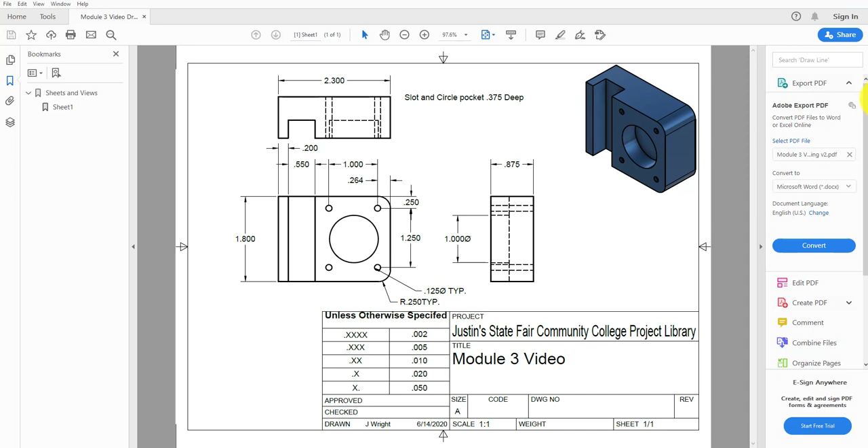Looks like 4 of them on there, and really they're spaced 1 inch by 1 1/4 inch, but they're really not 100% central to the circle on there. Looks like we got some fillets on the outside, so some corner radiuses going around the outside of it. So your assignment, like I said, will be very similar to that, but not the exact same thing. So let's get started drawing the part and creating the model, and then we can work from there.

Okay, so I'm going to move this guy out of the way, just so I've got the reference of it over here on my screen. And let's make sure we've got this thing pushed into view. Looks pretty good. Okay. So we are going to start. So I've got a blank screen. I've just got my Fusion pulled up. I've been playing with it for about the past hour, just making some new drawings and new designs for some of the upcoming projects.

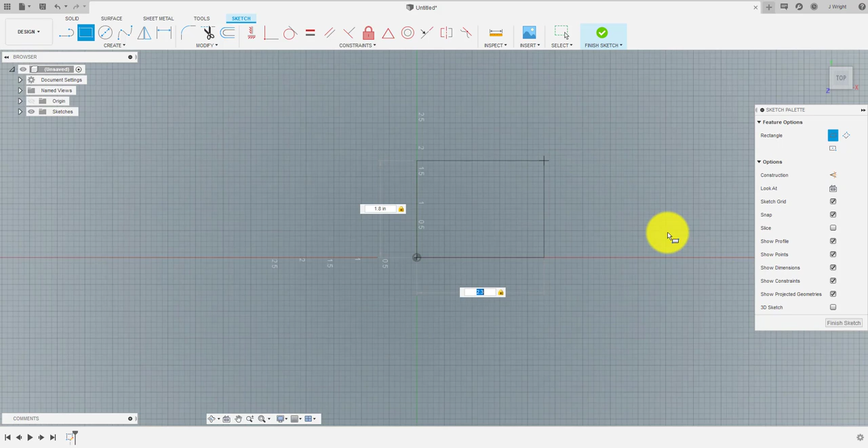So here I am. I'm going to start a new design. I'm going to go on up to the top because I want my Z to be in the positive, and click here. Just get my plane set up, get my grid set up, and as I'm looking at my part, it finishes at 1.8 by 2.3. So I'm going to grab my rectangle. Drag that thing out. And it is 1.8, tab over, 2.3. Click that for OK. That looks good. Finish that sketch.

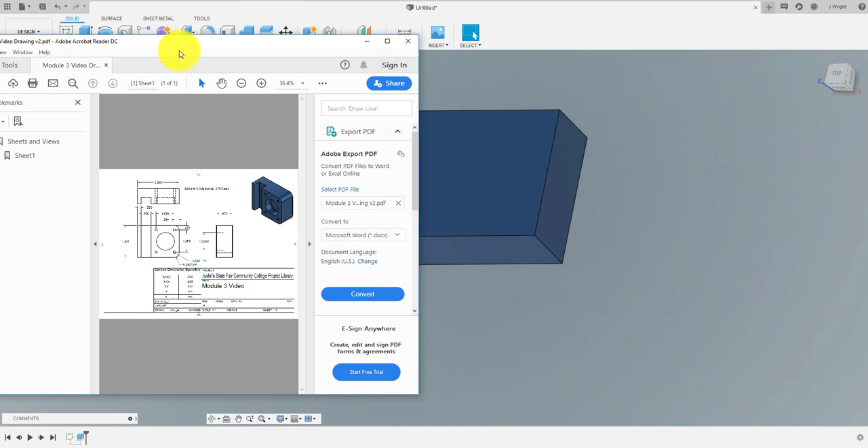Twist it just a little bit, and make an extrusion out of that. I'm going to flip it down the other way. I want to go negative 0.875. Drag that thing down. That's my rough outline shape. I'm going to go ahead and hit the outside corner radiuses. I'm going to bring the print back in here for view. Put it right here for a second. We can move the part around. Got this part sitting right here, and we'll pop that guy up.

Where did she go? Okay, so if you can see it well enough, get some of this other junk out of the way. I'm going to hit these 1/4 inch radiuses. So 1/4 inch typical in 2 spots, goes all the way down on it. So we'll start working on that next. Typically I have some type of pattern that I work on the part. I made this part earlier, so this is really my second run at making this thing. Not always do I do it the same way, but I generally have a pattern.

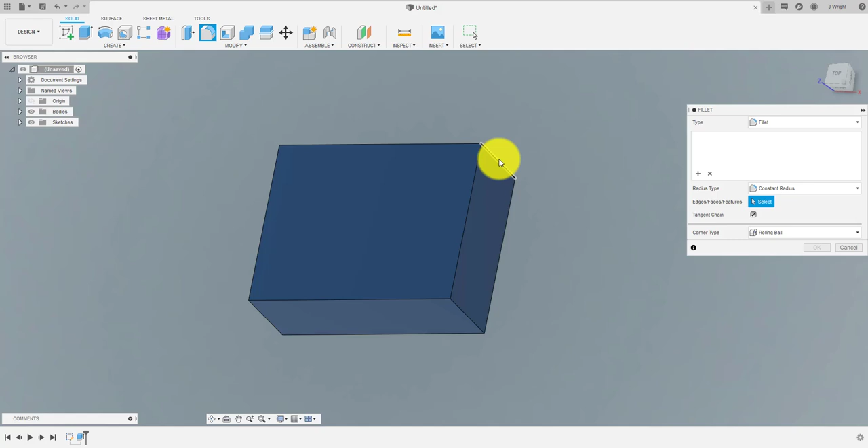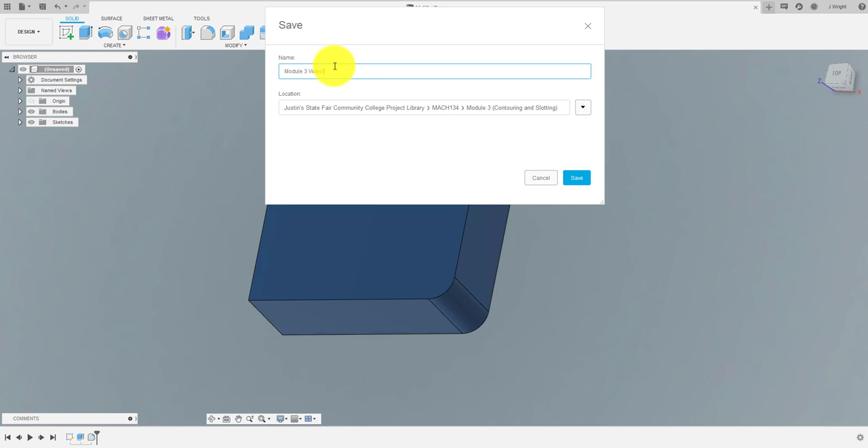So I'm going to hit this corner as well. I got 2 edges selected. I can go in and put those in at 1/4 inch. You can see it changed to 1/4 inch, and hit OK. Now I'm going to do what oftentimes gets forgotten. I'm going to hit save. I've already created a MACH134 Module 3 folder earlier, and I am just going to call this Module 3 video step by step.

Okay. So we'll save it, and then now I've got that thing ready to go. Got it dialed in so that I can use it. So you can see it up here. It's named. And next thing I want to do is kind of dealer's choice. But probably what I would do is work from left to right. I'll put my slot in first and then maybe do the circle and then do the 4 holes around it.

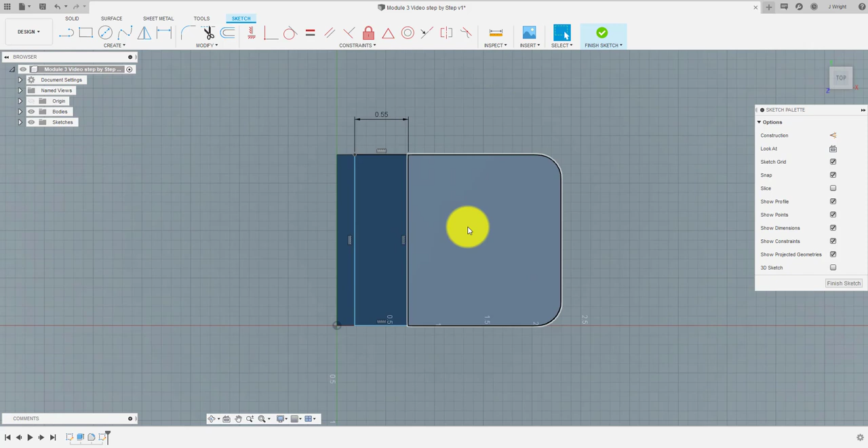Okay, so I'm going to go in and create a new sketch. It's going to be right on top there, and it's going to be shaped like a rectangle. It actually will be a rectangle. It will be 1.8, automatically hits that, so I just tab out, I go 0.55, and good. So now I've got my width established and my length going all the way across the part. So go ahead and grab this dimension button here and go from this edge to this edge here, and it needs to be 200 thousandths off the edge, I believe. And there we go.

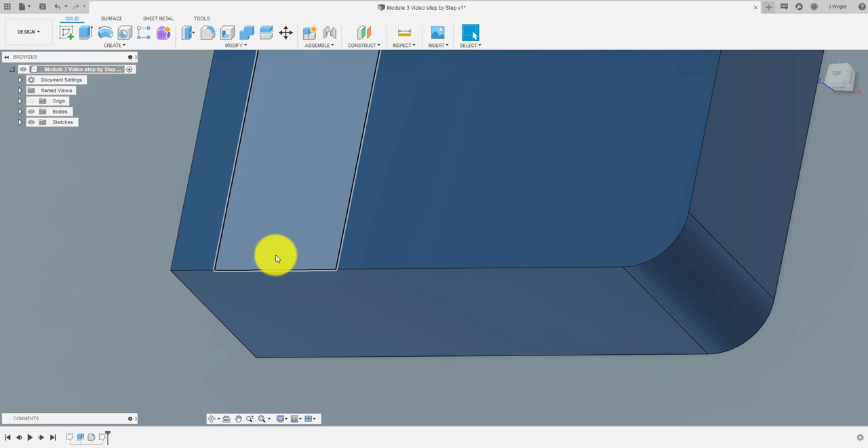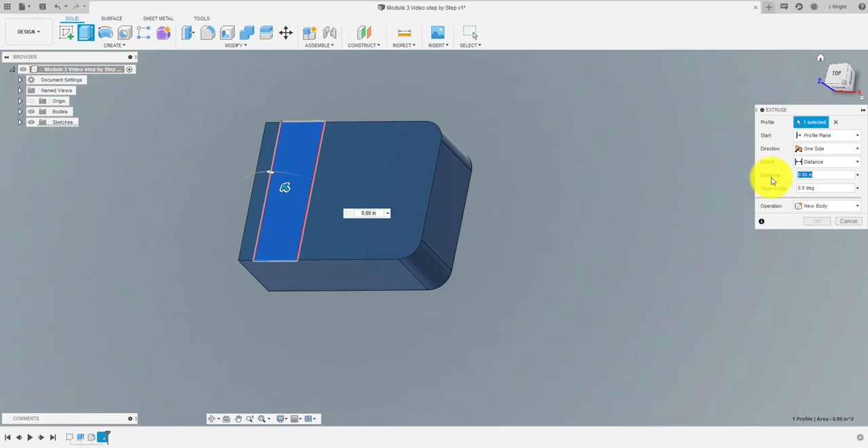Finish that sketch. So from here, now this looks a little wonky down here. Could just be the way that I'm tilted. So what I could do is put the circle in next, and then I could extrude both of them. I'm already here. I kind of like to work from left to right. So let's go ahead and extrude this thing down. -0.375 is the depth for that guy. And we're going to cut into it. So we hit OK. And we've got a cut in there.

Now, if you remember from last time, we've got this timeline building down at the bottom, and it's just a really quick way to see everything that we're doing. So this is just a replay of the build that we've gotten here so far. All in all, pretty simple. We've just got a rectangle that's been extruded down. We've got some radiuses in the corners here, and now we've got a slot that runs through it. 200 thousandths off the edge, 550 wide, 375 down.

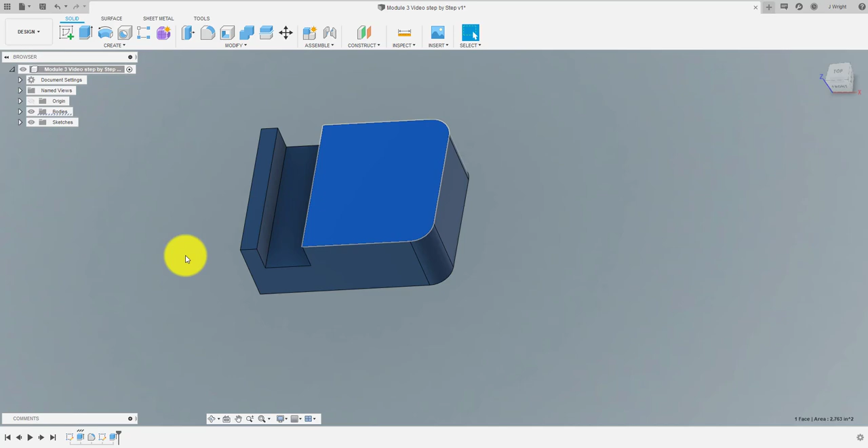Next thing I need to do is put a circle in the middle of the part. So we're going to create another sketch, put that right on the front there. I'll put that circle right in the middle. Let's put it right there. And we're going to go to 1 inch, so 1.0. And then we need to pull it around to the middle. So I think here would be 800.

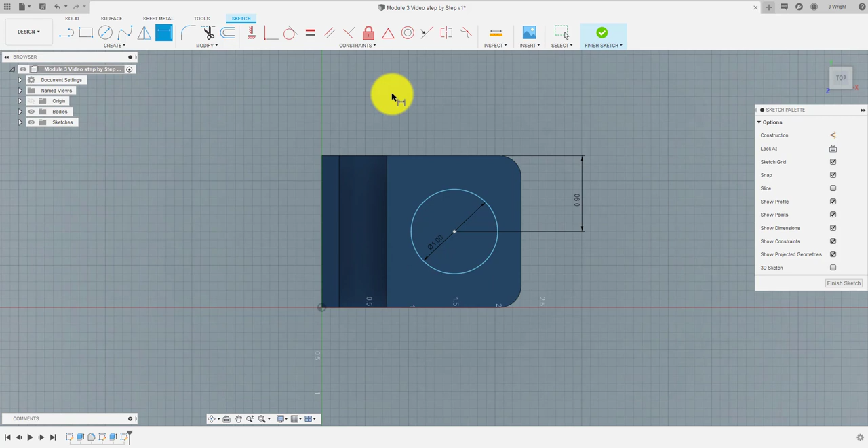And then my other dimension from this edge. Gosh, I'm looking back on my print and I don't have that dimension there, so let's just say that is 0.75. Okay. So we've got a circle there. Finish that sketch, and then we will continue to do the same thing. So if you notice, we're kind of going in a rhythm. Draw the 2D shape, extrude it out. Draw the 2D shape, extrude it out. And so that's the pattern of a lot of these more simple designs.

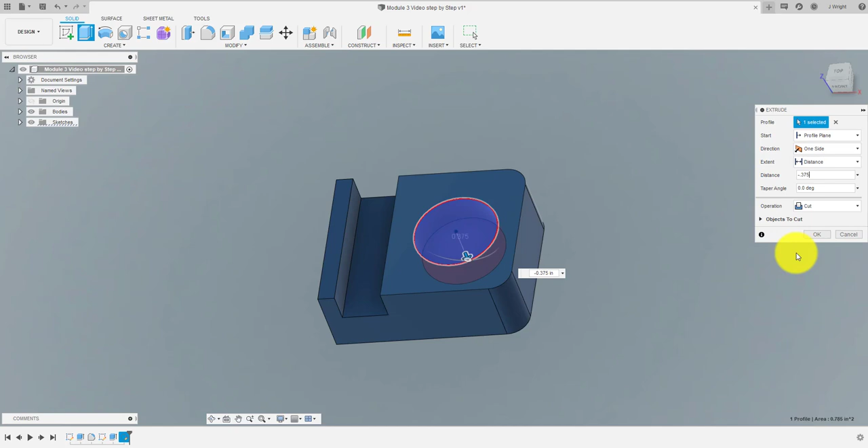So here I just clicked on my circle. I want to go down 375, so -375. Got my extrusion in there. It's cut. Moving along through it pretty fast. So if I get flipped around or upside down, I can just keep rotating myself back around, getting in the spot that I want. I've got shadows set up so that I'm going in the plane that I like. It's just more of a personal preference.

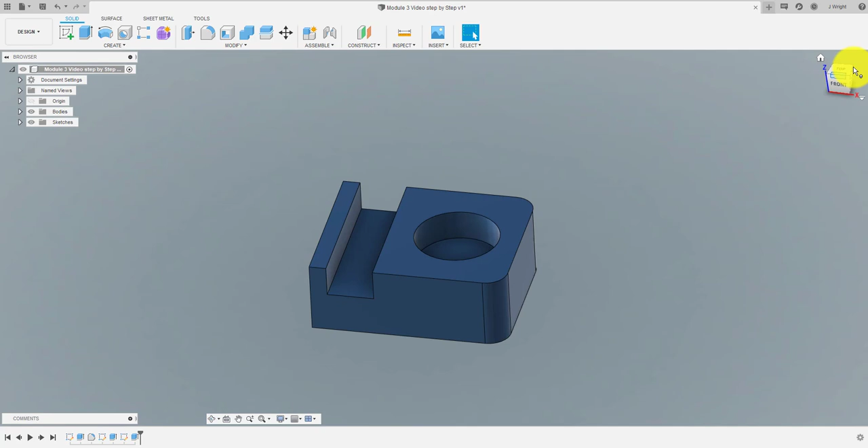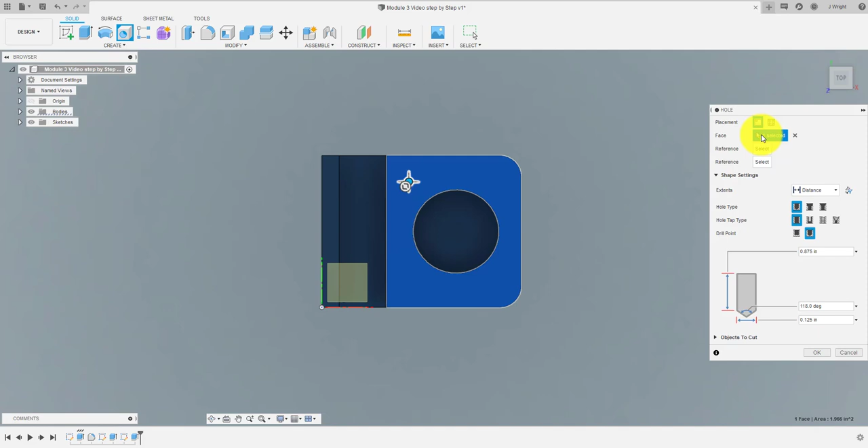Okay, so now I want to go back to my top. I want to create some holes, those 1/8 inch holes, and there are 4 of them. What I'm going to do is create a single hole on this face right here. It is going to go through, and it's going to be an 1/8 inch diameter, so it's got to go at least 875 deep. And I will put it into place. So I'm going to get some dimensions, and from that edge, according to my print, I am 1 inch, 264 thousandths.

Okay. Now I'm going to click this next edge, and it is going to be 250 from the top edge. That's my first hole. You can see the gray behind it, so that means that is a through hole. So we've got that. Now I can continue on and draw myself 3 more holes, or I can go over here to this little grid looking thing.

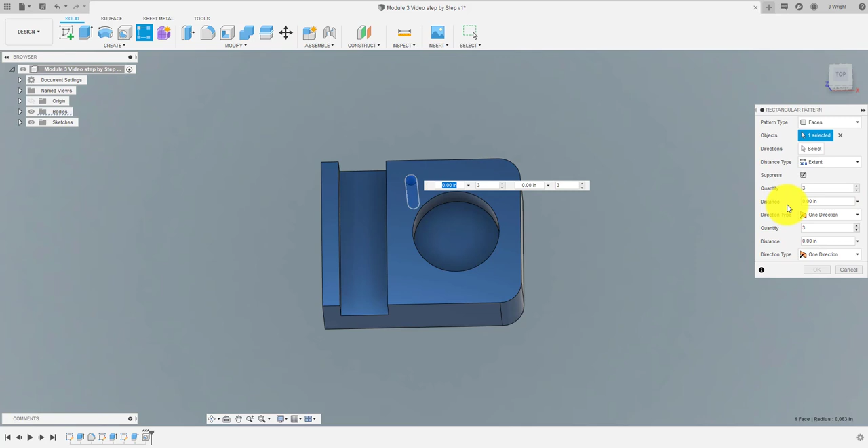It's a grid. So next thing I'm going to do is select the object that I want to copy. I'm going to make a rectangle pattern. And I'm going to go over 2 holes and down 2 holes. And those holes are going to be spaced 1 inch apart.

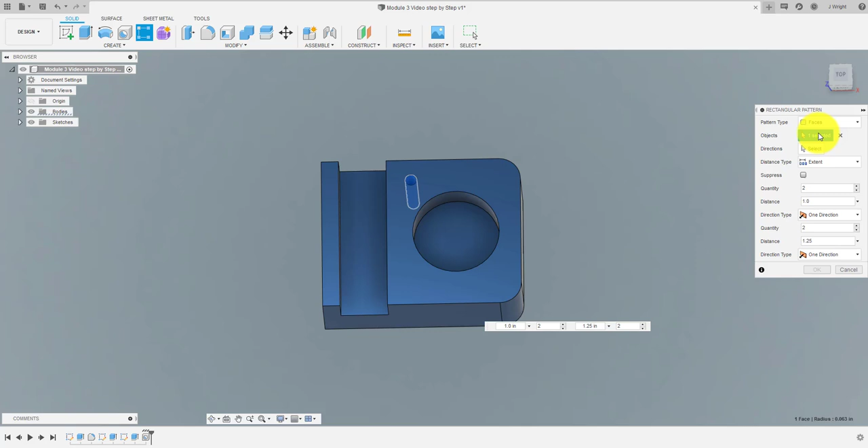And I'm going to go 1.25 down. And I'm going to show them. And let's see, I have not clicked a direction. So direction is going to go this way. Sorry, I got out of rhythm. I should have went top to bottom, and I did not.

So I'm going to go 1.0. Let's go. I can either go negative 1.0 here, which is probably easiest. Get it on the other side, and then my other directions would be going down here, and then that direction. Whoops, need to click that down to 2, and then we'll go to here at 2, and then we'll go down here at 1.25, and that creates my square. See, it's starting to form there.

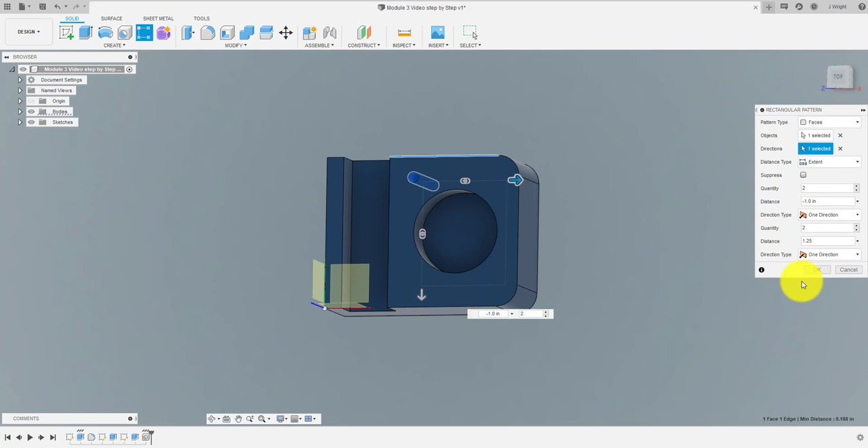And so I have my object selected, and I need to pick direction. I need to kind of follow the pattern from top to bottom. It makes better workflow. So from there on out, I can click that, get my 4 holes. And see, almost drawing in Fusion or Inventor, HSM, whatever it is that you happen to draw in here, we're just using Fusion today.

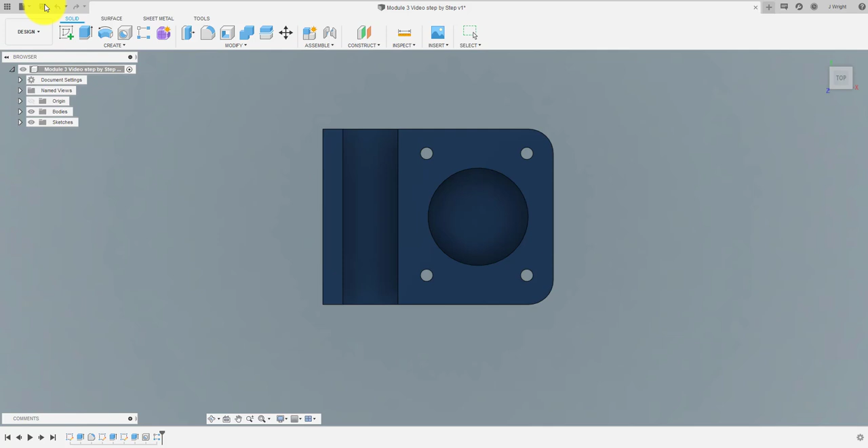No lie, Fusion happens to be one of my favorite things. It's almost too easy to draw in it. You know, if you go back to the time, if you drew in 2D AutoCAD, to do this was a much more labor-intensive project. What you do is you find yourself kind of just writing a lot of notes, and you were not able to make such vivid 3D drawings.

So that takes care of essentially my drawing itself. Again, I am saving, so it's grayed out, so I've saved all I need to. If I want to just force a save, I can go into Save As and then save it again. If I want to go from the beginning again, just like we showed before, we can kind of go step by step all the way through it and get all of our steps. Anyways, that's just for show.

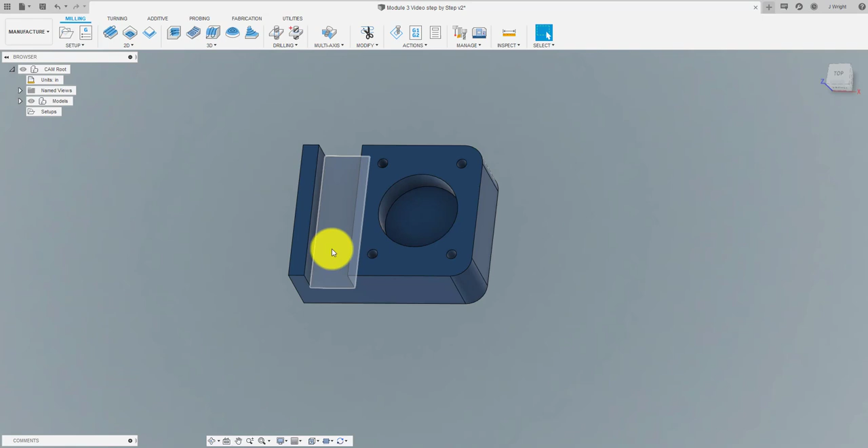So I've already created a drawing, so I'm going to go straight into manufacture on this thing, and I want to make this part. Now, I already know kind of how I'm going to do it. I already talked about it a little bit. I've got a piece of stock that's 1 by 2, 2.5 inches long. Hopefully somebody sawed it up and made it at least close to what it is. It's going to saw at 2.3.

I know the tendency is to, if it's going to saw at 2.3, we're going to saw at 2.5, and then it starts to grow and starts to grow. Remember, you're making your end mill do a lot more work. You're not always saving parts. You're not always saving time, and you're not always making better choices in doing that. If the saw length is set for 2.5, 2.5 is the goal, okay?

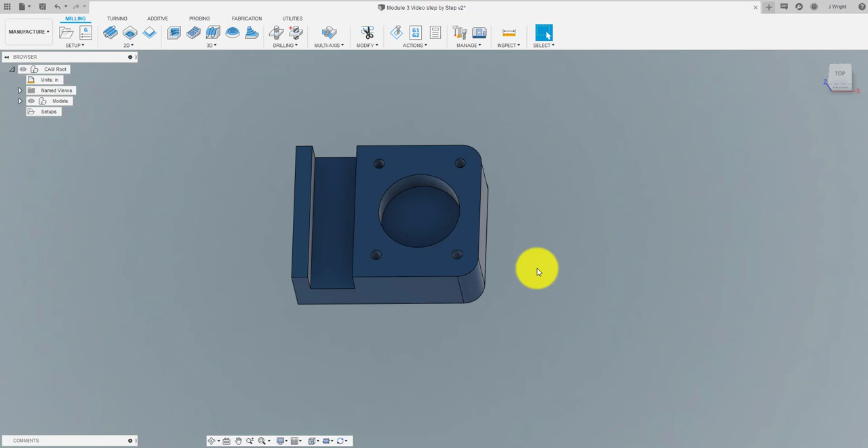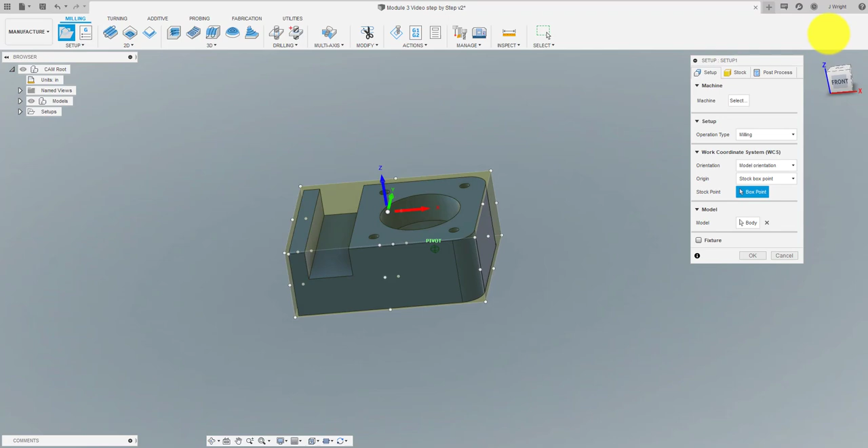So in my manufacturing, I want to stay kind of going across this ribbon left to right as much as I can. I'm going to veer from it just a little bit. I'm going to jump over here into some other parts and then hop back in. So I'm going to go ahead and do setup. And like I said, I'm going to have something that is 1 by 2 by 2.5.

I want my 0 point to be up here at the corner of the stock. Okay, so that means when I come in, I do my edge finding. I'm doing my edge finding from stock since I'm milling all the way around the part. Okay, I am milling. I can select my machine here if I want to. Choose this Haas. At this point, it really doesn't matter. No fixturing. I'm going to try to force myself to go top to bottom, left to right.

Now, what I don't want to do is just do this standard stock offset of 40 thousandths. If I do that, it's really going to cause me some pretty big issues later on. I do know that I have about 100 thousandths around it that I need to work from, because we said it's 2.3. We're going to saw at 2.5. It's 1.8. It's 2-inch stock. So that makes pretty easy math.

And now our top offset, I want it to be 50 thousandths. Again, that's just for easy math. Our overall part height is 0.875. So I want my bottom, if this is 50, I want my bottom to be 1.2. No, 0.12. There we go. And so now, let's see, I've got something just a little bit off here. So I'm 2.5 by 2.

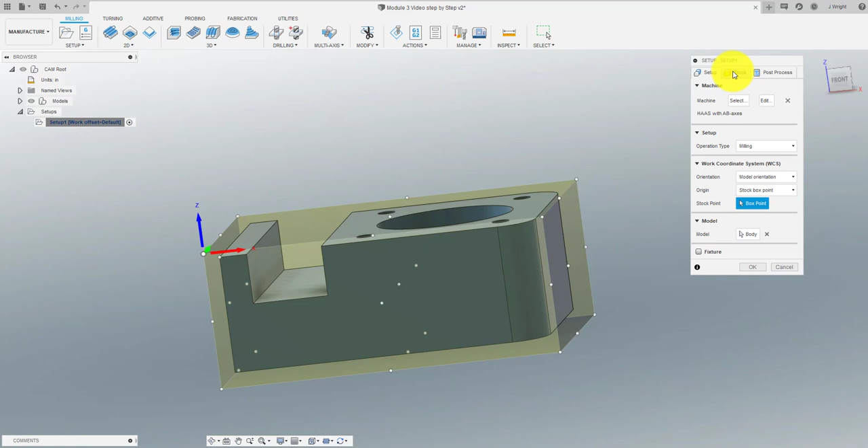So stop there, go back here, and I want to go back into the design, and I want to look here at this feature. I am 875 deep, but somewhere I've gotten off on my math. So let's go back to manufacture, and let's do this. Let's go back in here. We'll edit this guy. Going from left to right, top to bottom. We're going to go over here. Our side offset is 100 thousandths. Our top offset is 50 thousandths.

If our overall part is 875 and our stock is 1 inch, then okay, 0.075 puts me, so just bad math on my part. Okay. So earlier I had said that we had about 100 thousandths to stick up. That's going to get much, much smaller. So I think what I'll do is I'll go ahead and just do this. Let's give ourselves bottom offset of 100 thousandths. And then let's give ourselves about 25 thousandths on the top. It is a stock piece. Again, that was bad math on my part.

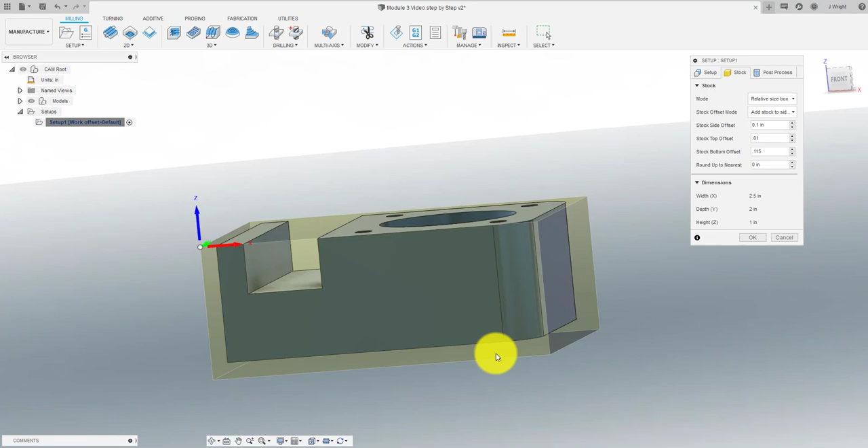I might even just shorten this up just a little bit and call this 10 thousandths on the top, and then 115 thousandths in the bottom. Because I want to show you what we want to do here as we're milling. So I got just a little bit up there that you can see, and then if I'm in the vise jaws 100 thousandths, I need to have it up just a little bit more. So at this point I'm okay again. Okay, so just a moment there, and I can come over here.

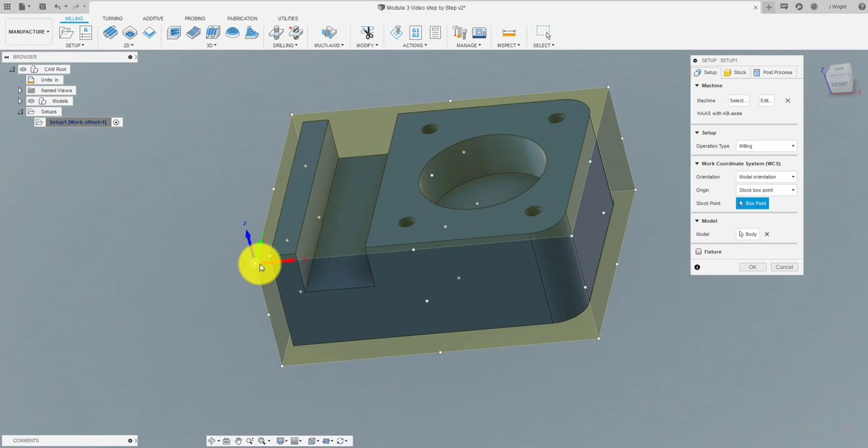I'm going to go ahead and use a new work offset today. I'm going to go to work offset of 1. That's going to be G54 on that work coordinate system. So everything else stayed in place. And corner X0, Y0, Z0. Easy setup on that. And I can hit OK.

All right, so if I want to, I can name that here. And I'll just call this, let's call this the BF, no, we don't want to call it that, so we're just going to call it mill setup 1 of 1. How about that? Okay, and that setup is done. At least we know what it is, where it is, and how it is. So next thing I'm going to do is start to work through milling around the outside of it.

Last time we did no outside milling, we had a part that was like 2.5 by 2.5, or maybe 2 by 2. All we did was some pocketing, some facing, and I believe a drilled and tapped hole in the middle. So what we're going to do is something that in the beginning of CAM life I probably thought was foolish, but now I think it's a little bit better. FeatureCAM used to use it a lot, and they called it AFR, automatic feature recognition.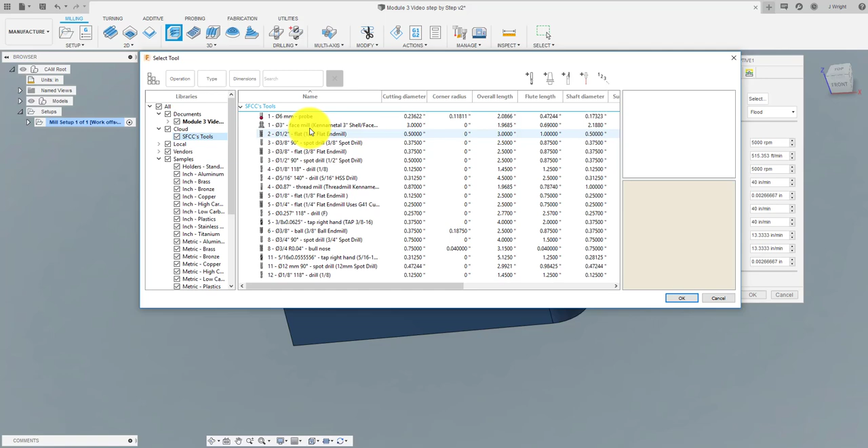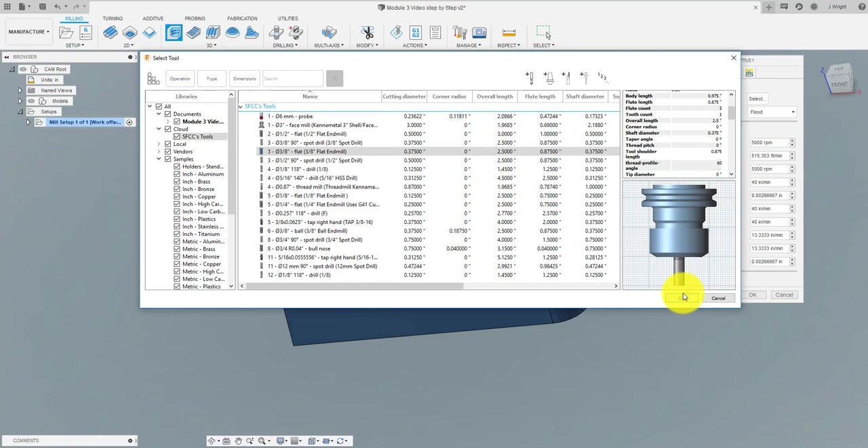And so what I'm going to do is I'm going to go in here and hit this adaptive. Now adaptive is going to try and start to work off of what I've got, and what tools I choose and try and do as much as it can. Okay, so I'm going to go in and just for fun here, I'm going to grab this 3/8 flat end mill, 3 flute end mill. It's got a flute length from the shoulder 875. Yeah, it'll do this part, but it'll just do this part. And really, for what we're working on, it's probably going to be right on the edge of even being able to do this part.

Spindle speed and feeds and speeds, 40 inches a minute. Sounds like it's okay. I can either make some adjustments here. I love an even number. And bad thing about that is it's always going to change one other number. So we're going to say we're going to go at a 5 thousandths chip load, and we'll leave the ramping in and out and the plunging okay. So this end mill will need to be, not self-centering, bottom cutting. Will need to be able to go down because it's going to do a spiral cut into this.

And if it's not bottom cutting, you have a pretty good chance that you're going to have some problems on the bottom. Okay, so I'm going to go in here and I'm going to click the model. And I want to make sure I click the entire model, okay? And I really don't need that taken care of. I don't really need that. So I'm going to come over here. Now here's something that, actually I'm not going to do anything with this now, but I'll come back to this.

Okay, so again, 3/8 end mill. Here's kind of where we're doing all of our stuff. Stock to leave. I don't want to bring this into finished cuts. I want to go ahead and rough it out and then finish it out. In the print, I'm giving 3-place decimal plus or minus 5, which would marginally be, depending on the end mill that you're going to work with, would probably be okay. We're going to leave 5/1000ths in both axial and radial. That should take care of everything there, and then I think I'm pretty set from here on out. And let's see what it looks like.

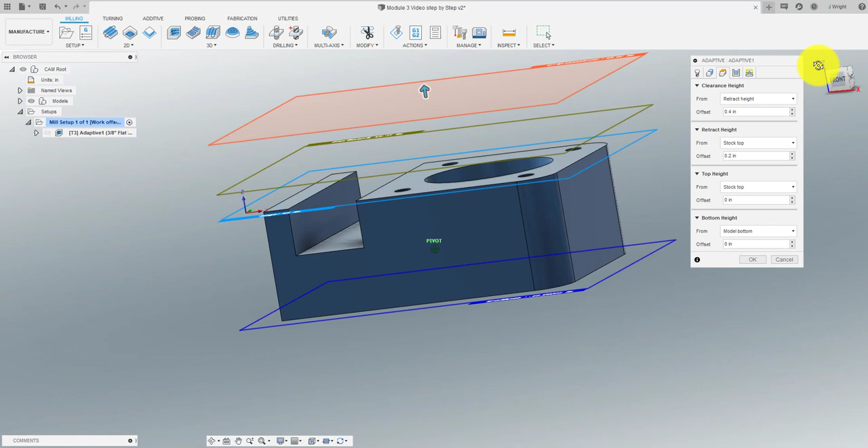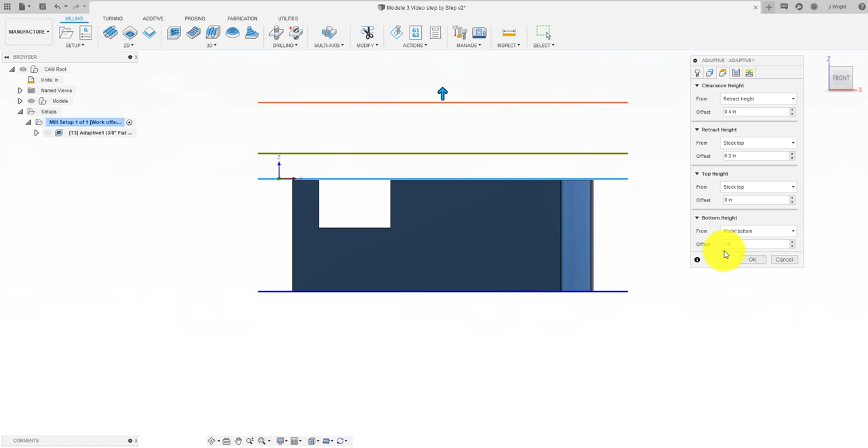And one of the things that I want to do is I want to change out where I stop. Let me flip it to the front. I actually don't want to mill the top of it. And I do want to go beyond the bottom of it. So the bottom of it, I got the model bottom. I want to go beyond it by about 50 thousandths. So you see it moving it down. Actually, 50 thousandths is going to be too much. So let's go 10 thousandths deeper. Then that way I can get beyond that bottom. That way whenever I go to my second operation, if I want to flip it over, chuck it in the vice jaws or a fixture or something, set it in here, mill off that back side, and then that way I'm not left with a little razor edge going around that.

Okay. So let's see what we start to look like now. Looks pretty good now. This is a lot better part. So now I'm milling around the outside of it. Flip back over here into this front view. Rotate back up. And as you can see, I'm coming through and I'm doing some clearing on this. Coming in here, knocking this guy out. I'm not doing any kind of facing on it. Though I could come in and take this 3/8 end mill and do some facing if I wanted to, but for the way I want to finish this part, I don't want to mess with that. It would be really redundant, especially since I've got like 10 to 15 thousandths on the top. I'm going to end up cutting and recutting essentially the same thing, or I'm going to have some paper thin chips.

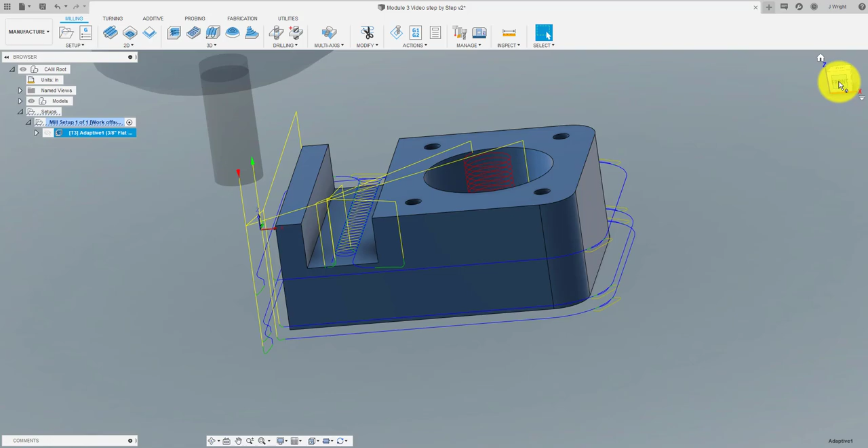So here's what I wanted to really show you: look what Adaptive is doing. Adaptive's taking care of all of my milling around the outside, leaving stock. My milling throughout the slot, leaving some stock, and my milling all in this pocket, again leaving some stock. It's coming down far enough that I can get below the part. Like I said, I'll need to do a little bit of work to my end mill to be able to get it to go all the way down. But this is really slick at this point. I mean, it's essentially one operation doing a whole bunch of stuff.

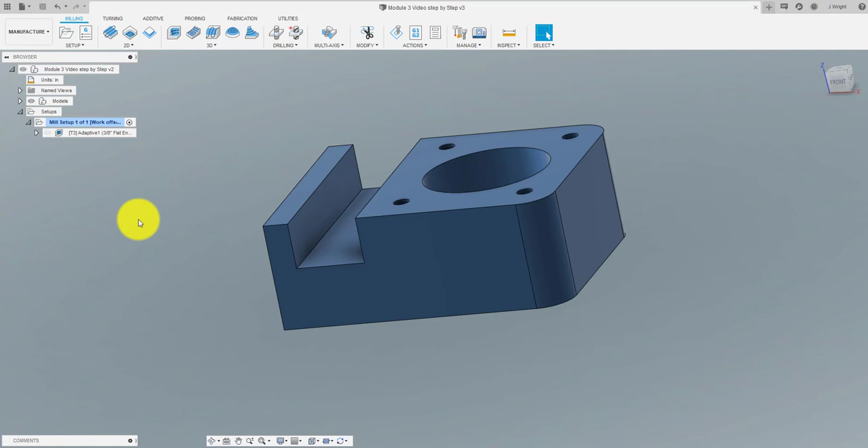Okay. So at this point, if I wanted to continue on with this roughing out, finishing out option, I'd probably go to my holes next. What I want to do is I'm going to go ahead and come into my automatic feature recognition.

Sorry, hole recognition. Now it's coming up with two different things because it technically sees two holes here. It sees some 1/8 inch diameter holes, 1, 2, 3, 4, and then it sees one 1 inch hole. I don't want that 1 inch hole. I don't want to mess with that thing. So I am just going to ignore the 1 inch hole.

Okay, so now as I do my hole recognition, it's going to go ahead and just post out my 4 holes. Now, one thing I want to come back to in that is there's a lot of hole choices that it's going to come up with. Honestly, depending on what kind of a drill I'm using, I may not even spot drill these holes. If I've got a good little 3-flute drill, or maybe even a spade drill, and a nice little drill,

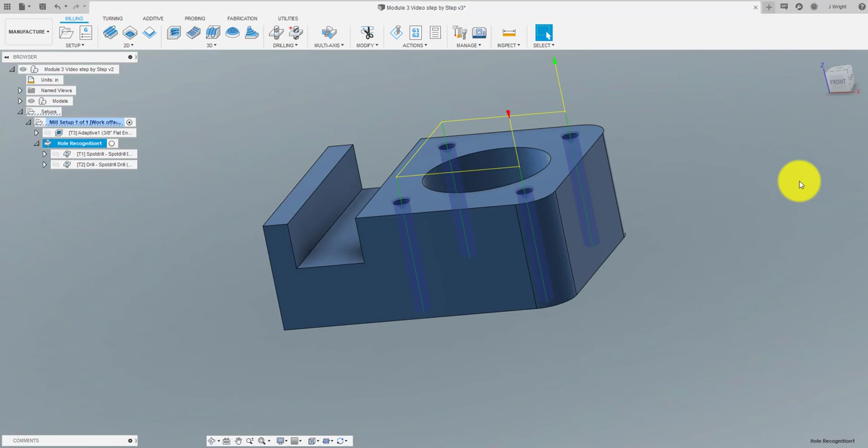it's small in diameter. You're talking about 1/8 inch, and it's got to go down .875 plus clear the hole, so another 0.3 times the diameter to get through there. It's got to go down a good solid inch to get through it. So maybe I'm spot drilling, maybe I'm not. At this point, I don't have a really good tool set up. I have them sitting here as 3, 1, 2 is the way I should say it. But I've got the holes in there. I can keep working with that as I go.

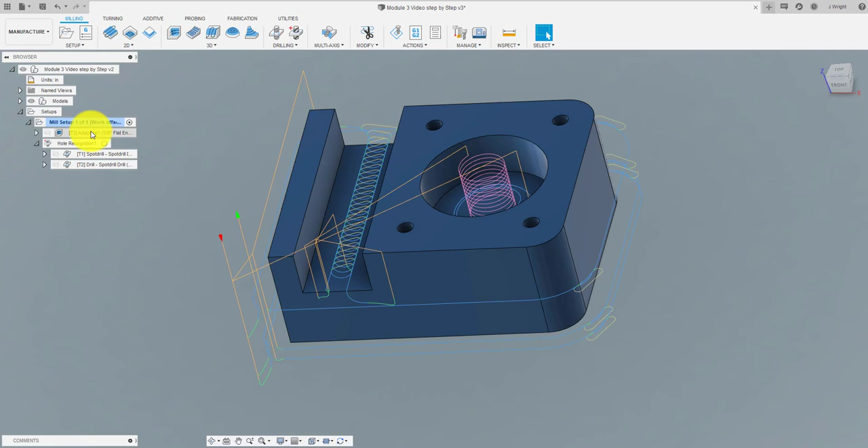Okay. So here I've got my milling of the outside, so all of my roughing. I've got my holes done second. And then now I need to come in and do some finish work on this part. And so what I'm going to do is I'm going to go back and do some facing. I do not want to use that same tool. I could, but I do not want to. Go back in to grab my 3-inch Kennametal face mill.

So I want this face, and I also want this face. So I want to make sure I go all the way across there. So 3-inch face mill, I'm going to go across there. I do want to extend it. Pass extension by, let's go 1.6 just to get off of that part. Don't need to do multiple depths, don't need to do any kind of stock to leave on there. And it should be good to go after that.

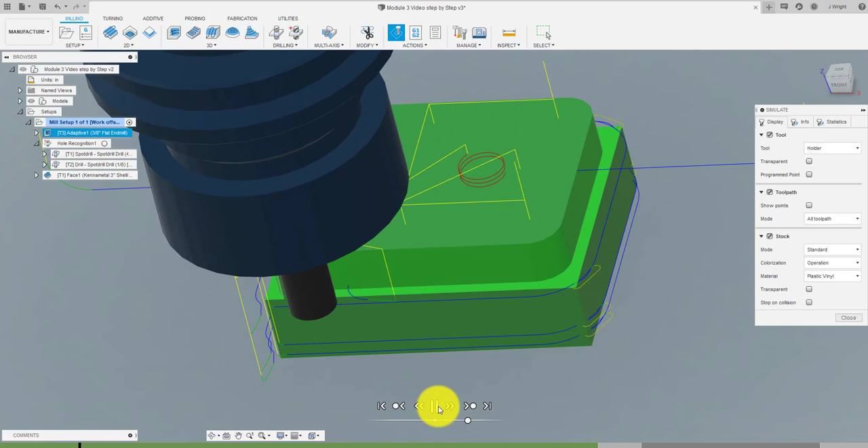Okay. So if I want to watch from the get-go, I come up here and take a look at this thing. So I'm milling around the outside of it. You can speed that up if you want to. And remember, it's trying to make good decisions as it goes through so it can be as efficient as possible. And that's why you're going to see it do some things that may not make sense to you. Like really, it's taking care of all of the machining at the -.375 depth right now. If I was manually machining that, that's not the pattern or path that I would take. But you're talking about seconds of decisions, and it's good enough for what we're working with.

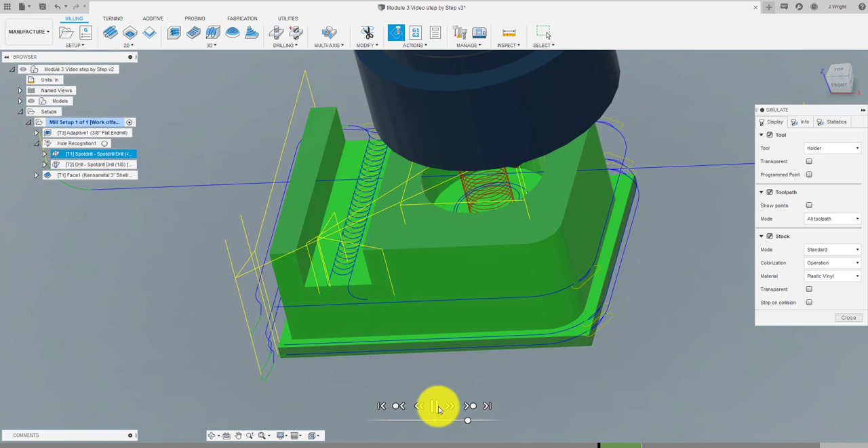Now, if I was making billions of these, well, first of all, I probably wouldn't be making them quite like this or with these tools. But in what we've got, if we need to make 100 or less, this is an appropriate way to do this. Okay, so that should be pretty close to my final depth. Okay, that tool's done. Got 4 spot drill holes.

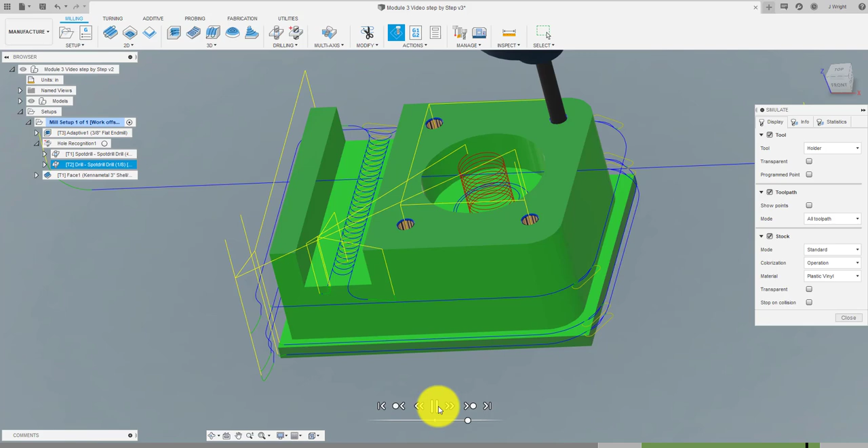Now, if you'll look, as it's peck drilling, it's not coming all the way back out. That's one thing that I want to do some changing with. But I am spot drilling deep enough to leave a little bit of chamfer on top of it, just so my deburring operations go a little smoother. Face mill is done with a nice magenta. Okay, so we can stop there. I still need to come through. So essentially all I have done in finish land is the holes are done and this top face is done. I'm going to go ahead and save.

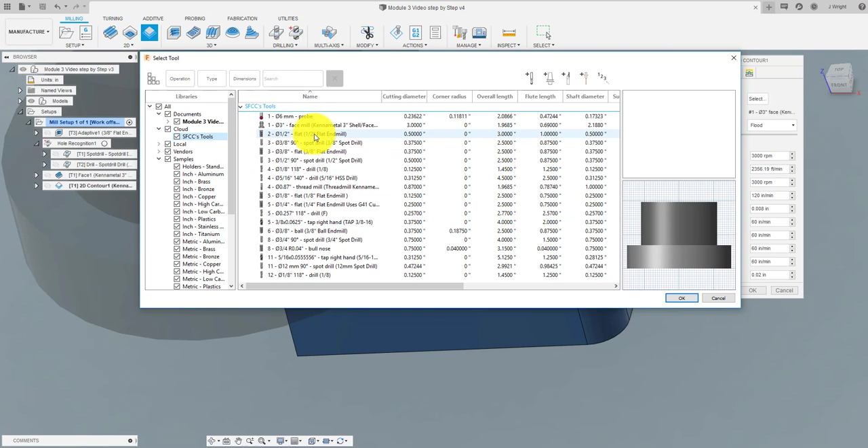Now, at this point, I want to knock out the outside of the part. I want to knock out the hole, and I want to knock out this slot. To do that, I'm going to go ahead and go into contour. And similar to adaptive, I can really probably do this all in one shot. So I'm going to grab a new tool, and I'm going to grab my 1/2 inch end mill. I know I just passed it. 1/2 inch flat end mill, and grab that guy, and it's a 3 fluter.

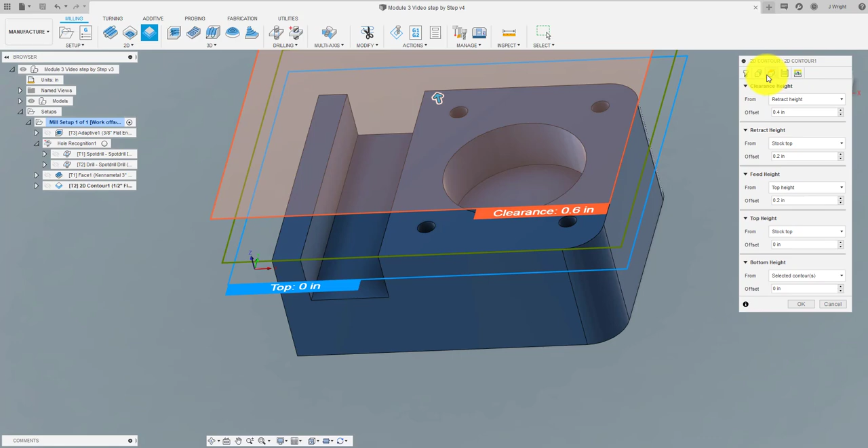It's not really a 3 fluter. We'll do some editing on that as we go, because RPM and stuff can be changed on that. Feed per tooth is okay. I would typically tell you need to make sure those things are right before you get started. That way you're not going back and forth over the top of yourself. Okay, so anyways, small distractions.

Go ahead and select my contours that I want to work off of. I want to go down. I want to mill all the way around the outside, so I'm going to click the bottom of this thing. Get down here so you can see this thing move around. All I do is click the bottom. Red arrow shows the direction that I'm cutting.

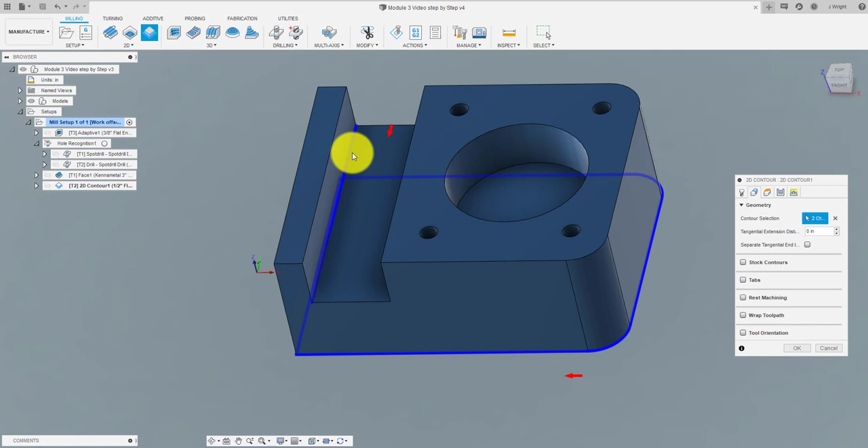Okay, so now I'm going to come in. I'm going to hit this side, and then I'm going to come over here and hit this side. Now, since I've got a 1/2 inch end mill and this slot is .550, if I remember correctly, I don't have to worry too much about doing any kind of special feature for the bottom, because you're talking about an end mill that's 50 thousandths smaller. It's going to fit into that hole or into that slot.

So now, same thing with the bottom of this thing. I'm going to come in, do the bottom of that. It's a 1/2 inch end mill. It's a 1 inch hole. My math is going to take care of itself as it goes. Okay. So let's take a look and see what that looks like. That's pretty dope. So we're going to come through here. One shot took care of all of my contouring.

Now, there are some pros and cons in doing that, okay? Now, first of all, I will say this. Even though I'm kind of showing adaptive today, this is probably not the path that I would take for all things. It's a little small of an end mill to be doing all of this work. It's going to take a little bit extra time to do it. Today wasn't really about speed. It was just showing that you could do this, okay?

Always, always, always try to get the biggest end mill that you can into the hole or the feature, within reason. Give yourself enough room for clearing out, for finishing, for moving around. But today was more demonstrative than anything. I want you to see that you can use this one end mill, and we've done that in class before. So here I've got all of my finished work taken care of. Now do a quick save.

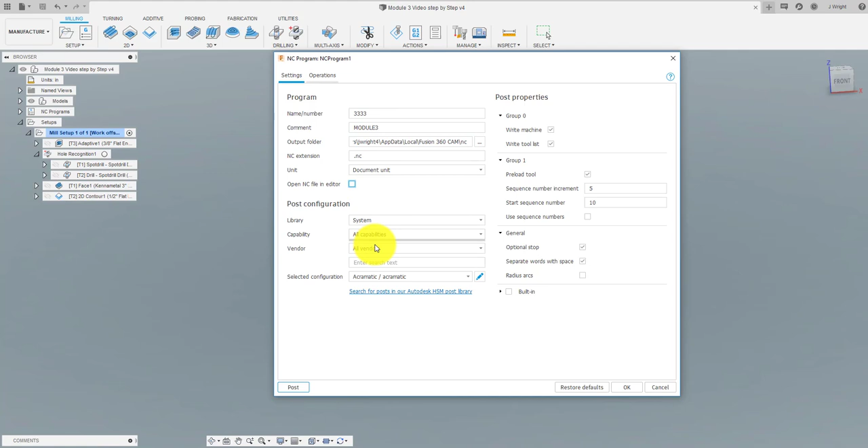Now say I want to... We're just going to call this 3333, and I'm going to do a caps lock, module 3. And I'm going to pick a milling operation, and I've got a Haas, and I've got a UMC 750.

Again, here you got a lot of personal preferences as to what it is that you want to have inside of here and what you don't. Some of these things are going to make some things go a little bit faster. G187 will make life just a little bit smoother depending on what kind of options you have on your machine, so you can start looking a little bit further ahead. Chip transport, if you got a conveyor on there; we don't have conveyors on our machines.

Forced home position on indexing, you can have that. You can have optional stop automatically show up. You can do preload on tool. Preload for tool doesn't do us any good, because honestly, even though I picked a UMC 750, I'm probably going to run this on a VF3.

G28 instead of G53, to be honest, that's probably something that I would check. That's just a personal preference. I guess I'm a little more familiar. Maybe I get a little more warm and fuzzy with a G28 than a G53. A G73 option, and that's kind of what I want to go back to in some of this stuff, the outputting of code and what it's actually going to be doing.

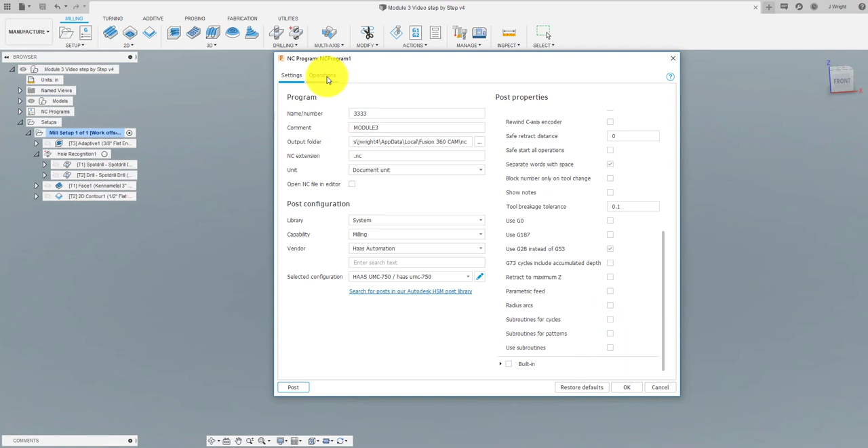Let's look at operations. At this point we have nothing selected, so we're going to select everything. We want to do all things from this particular operation. So I can hit OK. I could also hit post at that point if I wanted to. I'm going to come in, I'm going to do a quick save. Now let's go ahead and just look at the entire program.

So I can go ahead and go to... sorry, I shouldn't have done it like that. Come back up here to my NC program and do a right click from my NC program and hit post process. Come down here and hit view NC code. That's probably my smoothest, best process.

Again, you get intensely long code in outputting using a CAM system. You're getting much longer code because in the beginning you're using this 3/8 end mill. And if you're the programmer and you don't care about how long the code is, that's one thing. If you're out on a machine and you've got a lot of code in your library, this could start to be an issue for you.

Here's where we went to G28 instead of G53. If you do a G28, you have to go back to a G90 afterwards. So what we're doing is we're going to go inch input, G20, G91, Z0, our spindle goes all the way up to the top. We go back to absolute programming from there.

We went to G54. I thought we had clicked 1 in before, and maybe 1 is 54. I thought 1 was 55. We are absolute programming. B and C is 0. Again, I said we're probably going to run this on a VF3, so it's not going to matter. G43, H3. H3 matches up with our T3.

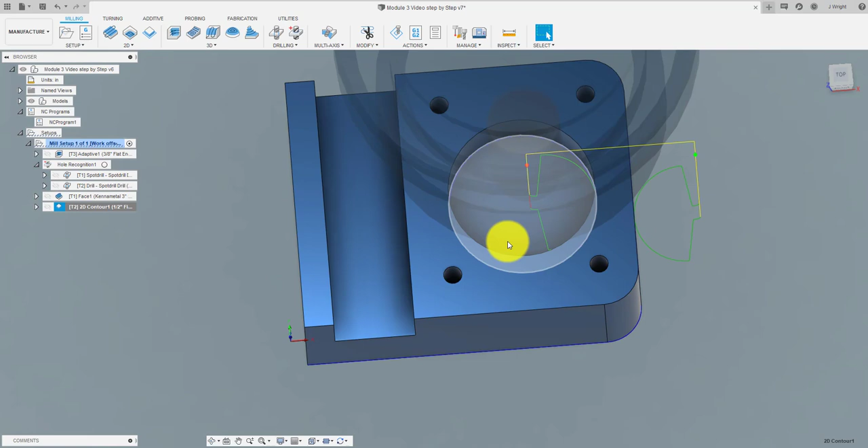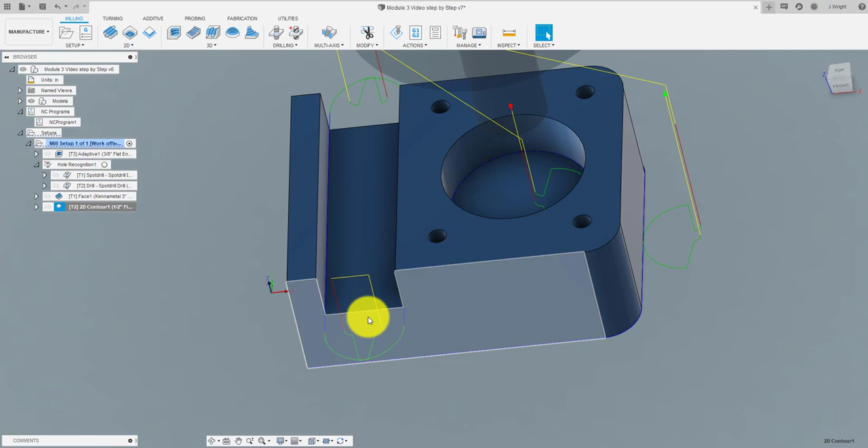Okay, so I get a little bit of a problem. I've got the outside going good. I've got the inside hole going good, but my slot will not generate. So I got to find out what's my problem in my slot. Well, my problem in the slot is about where I start my moving into it. The machine wants to come in with some smooth sweeping motions. That way it stops that little undercut or that little divot that you get.

So you can see, let's flip to the top here. My tool wants to come in, do a partial circle in, go all the way around, do a partial circle out, and then come out. Same thing here. Partial circle in, partial circle out. Ditto over here on the 3rd try. At 50 thousandths radius, my issue is I've got a 550 slot and a 1/2" end mill. If I was still in the 3/8 end mill range, no problem, plenty of room. 1/2" end mill, I've got a beefier, stronger end mill, but I have a lot less clearance in there because I only have a maximum of 50 thousandths.

That's when I'm done. Now I've left some material on here. I left 5 thousandths on each side, so I've got like 40 to deal with inside this thing. If I was manually programming it, I would just come over here, straight corner it, come in, shoot across, back and forth. I can do that here if I want to. But this is giving me some options to come in and do some nice sweeping radiuses. I get a better finished product from it. And to be honest, I could probably tweak up my starts and stops a little bit. Probably come in on this one side.

Wouldn't be my preference. I'd probably come in at a corner at some type of area instead of this giant flat. Now, if I was going to do another operation and cut this off of there, that'd be fine, but I'm not. That would be something kind of foolish to do, so I could change the start point of where that was at if I wanted to. So I've got that taken care of. That makes my program a little bit better.

That's my circular interpolation. Here's what I've been wanting to see: G1, G41, X and a Y with a D2. D2 matches T2, which also matches G43, H2. Okay, so I'm happy there. Let me go ahead and pop back up here and edit something in the post processor. We're going to go up to 2, come back, save that, so I now should be outputting in G55.

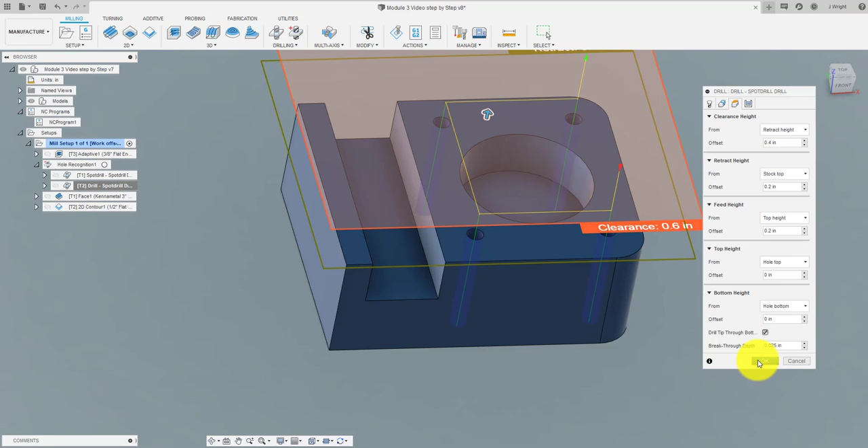One more thing I want to change. I'm okay with spot drill, but I had said earlier I was not in love with that. So I want to come in here and just actually pick the tool operation itself. I'm going to go back into edit. And instead of chip breaking, I want to pick deep hole full retract. And occasionally it'll say use cycle if it's possible. By doing this, it should take care of what I want it to do, I believe. So we'll do a quick save, and I know I'm kind of heavy on the saves. So I just want to output just that one itself and see what it looks like.

Look how much smaller that is. So we had like 1,000 lines earlier, and now we've knocked this down to 25 to 95, skipping in 5. We've got a short amount of holes. So we're doing a G83, G98 for initial level return, and then I got my X and Y, I got my Z, about 950 thousandths. My retract is almost 200 thousandths, a little high for me.

No kind of dwelling that goes in there. Probably my Q is a little bit off, but it is a small hole, so I can live with some of those other things. Probably the 190 wouldn't keep me awake at night, but it would irk me just a little bit. So I've got just a little bit better part now. I can go ahead and come back up here from the top and run it through a simulation. I've already seen it work once, so I'm just going to kick it up a little bit faster.

Okay, so holes that go all the way into the part. They don't come out the bottom, and that's okay. Everything that's yellow is something that my half-inch end mill did. My magenta, sorry, first day speaking. And my magenta is a 3-inch shell mill. My stock size was the green, and so it's left. You can't see anything left of the 3/8 end mill.

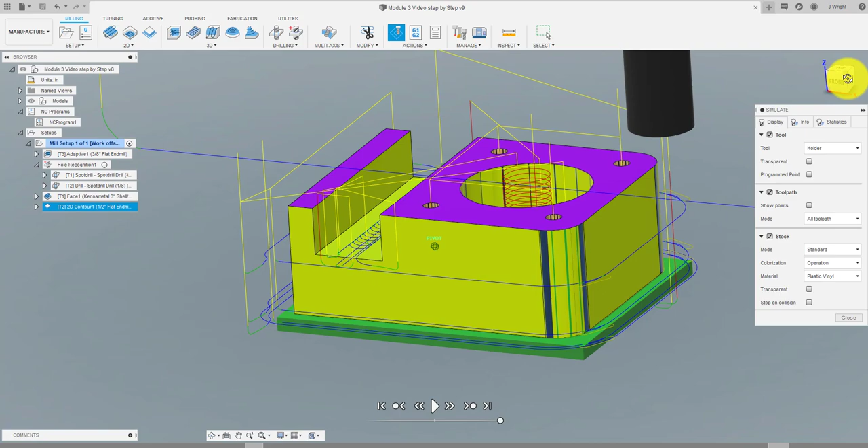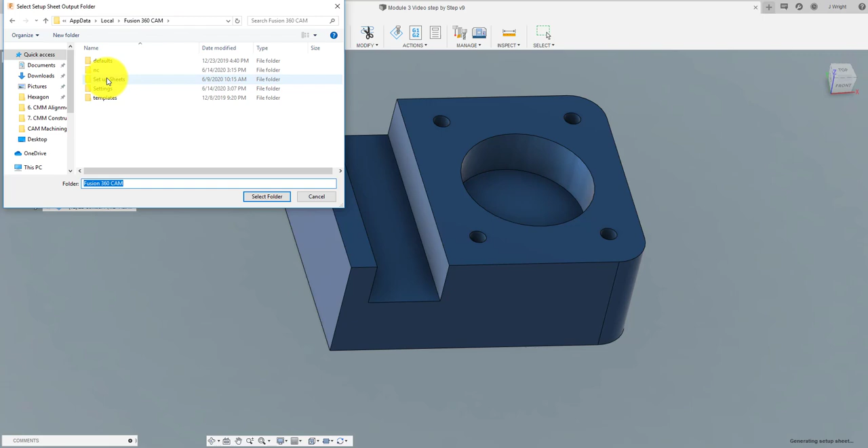Now, again, I don't think that this is a perfect part, but I think it's a functional part. And really today is about showing some different functions, how to use these same tools and get a lot of different results out of them. Okay. So let's take a look at our setup sheet and see what we look at time-wise. Setup sheets, and pop that baby up.

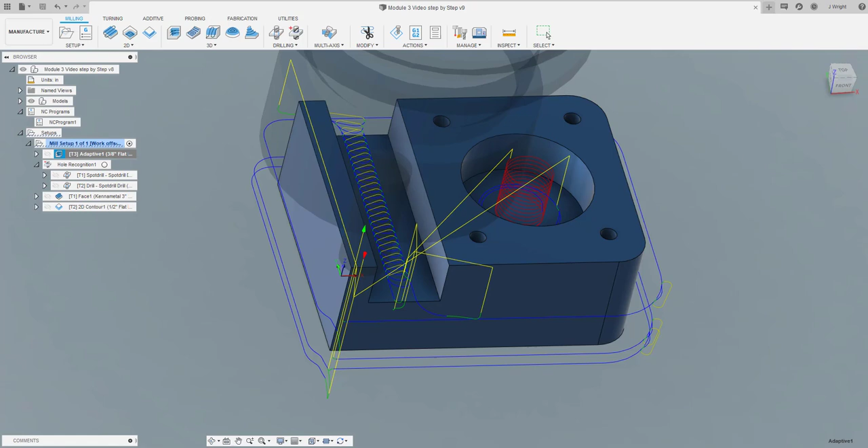I've got some issues. My operator would have a fit with this because he wouldn't quite know exactly what it is that he's supposed to be doing. I've not done a good job of making sure that he has the right information. So I'm going to go back into this adaptive, and at this point I can do a couple different things. So I could come back into just the tool itself, and 3/8 2 flute. Let's call this tool.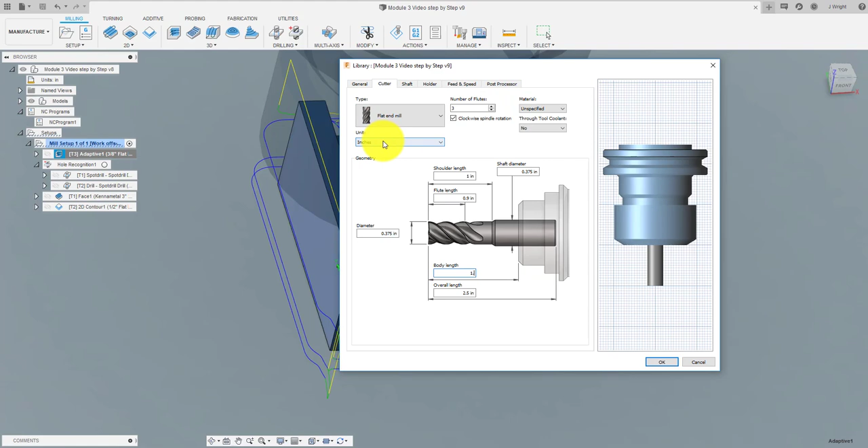Let's call it tool 10. We'll go down in numbers. Feeds and speeds: 90 inches a minute. Force it up to 5. Everything else looks okay. Let's say that this tool cuts 900 thousandths deep, and the shoulder length is 1 inch. Body length is 1 inch. Okay, everything else looks good. This is a 3 fluter that I've got, and everything else looks pretty good.

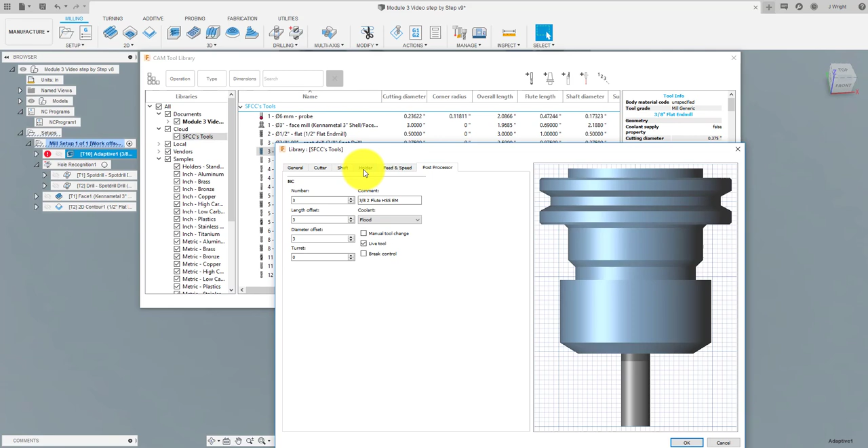Now, preference would be that you go to your tool library and work with your tool library first. Here's why I want to do it this way. I just want to show you multiple ways of doing this. If I do it this way, I go up into my tool library. I go to my SFCC tools, I go to my 3/8 end mill, and if I go to edit this tool, it did not. See, those things are not the same. It only edited for that one particular tool.

And so if I'm editing a tool that I'm going to be using over and over again, I need to go to the library first and then regenerate that tool, reattach it to it, and then work in the other direction. So if I'm just using it for this particular one, no big deal. But if this is what my end mill truly is, I need to make sure that it's in my library to start with in a correct way, so that I'm not continuously doing this over and over again. Imagine using your 3/8 end mill 4 or 5 times a day, and you have to go in and edit the tool 4 or 5 times a day. It's a lot of lost time.

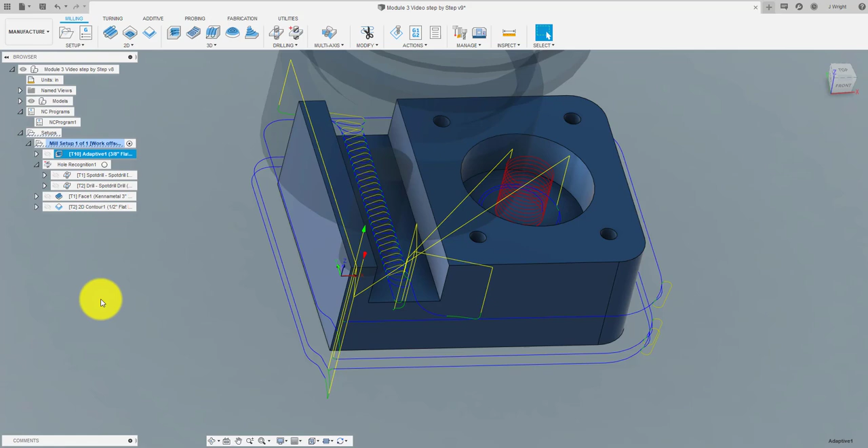As you can see, I've got a red exclamation point there. I can go ahead and fix that now a couple different ways. I can right click, I can go over to generate, and then just rebuild that. Takes care of it right there. Another way I can do it is Control G, I believe, is going to take care of all of them at the same time. And so really, from here on out, I'm going to go down 10, 9, 8, so just down from top to bottom.

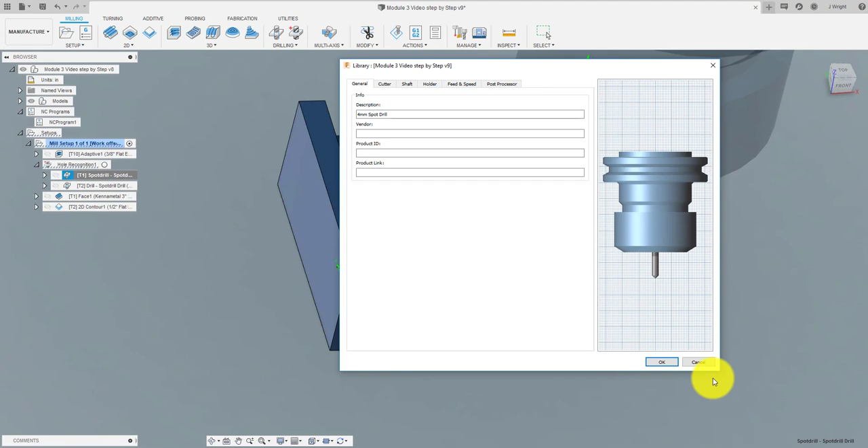So here I've got a spot drill. My mind says I've got a spot drill already set up. So instead of going to here, I'm just going to go into this operation. I'm going to go back over to the tool, and I'm going to go find myself a better tool. And I'm going to get that crazy thing out of there. I'm just going to delete that tool out. I'm typically not using a lot of metric style tools like that. Let's say I've got a ½ inch. I've probably got a 3 inch. There's a 3/4 inch. There's a 3/8 ball.

Let's go ahead and use this ½ inch spot drill that we've already got set up. And so I could probably find myself using, here we go, 3/8 spot drill, 3/8 90-degree spot drill. It's tool 3 in the library itself. Now, if it's going to be tool 3 in the library all the time, fine. If it's not, then maybe I'm just going to put it in for this one. So then I'm going to go to edit tool, and then I might just change tool location. So 9. Okay. Control G will take care of all the tools that need to be regenerated.

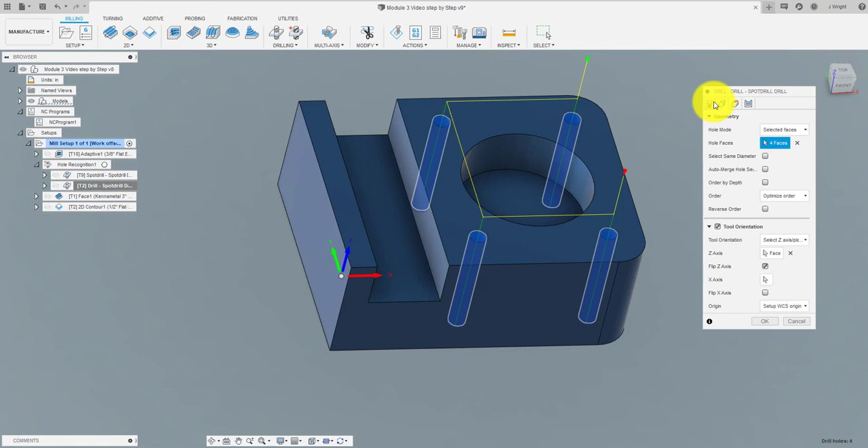Let's see if we've got an 1/8 inch in the library already. If you don't, it'd be a good time to do something like that. Looks like I've got number 12 as an 1/8 inch drill, 118 on the point, so I'll go up in here, and I'm going to go in and edit, and I'm going to go back over to the tool, select that tool, go into my library, grab that guy, go ahead and hit OK, and then jump back in real quickly, edit the tool, and I think this one needs to be number 8. Okay.

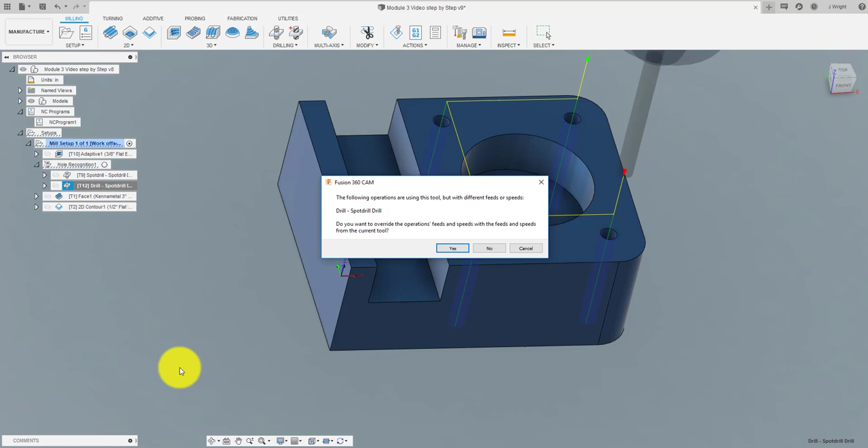All right, I'm gonna leave that one alone. This is gonna be 7, and it is the correct tool because I pulled it out of my library. So the only thing I need to do is change the tool number on it. So I can actually just type 7. It's going to change my length offset and my diameter offset for it. Okay.

But you can see I'm starting to kind of build some red exclamation points. If that's a problem for you, OCD wise, then take care of it. If it's not, then let it go.

I've seen some of your all's work. It's not a problem for most of you guys.

Okay, last tool is what, my 1/2 inch end mill. I probably pulled that out of my library. It's been 5 minutes. I can't remember back that far. So let's go in and edit the tool. Let's double check. Yeah, 1/2 inch flat end mill.

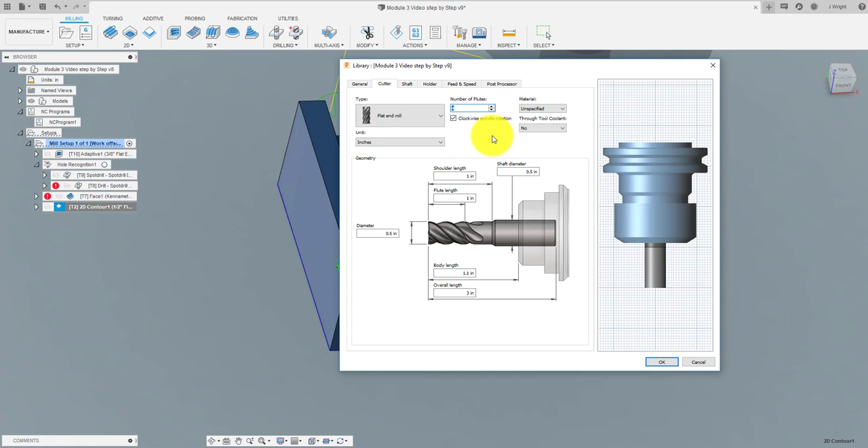What did I say? Flutes. I'm pretty sure that's going to be one of the newer Kennametal Harveys that I've got. So it's a 4 fluter. They're not quite the ones that I wanted, but I'm not sure what happened in my ordering. Apparently I did something wrong.

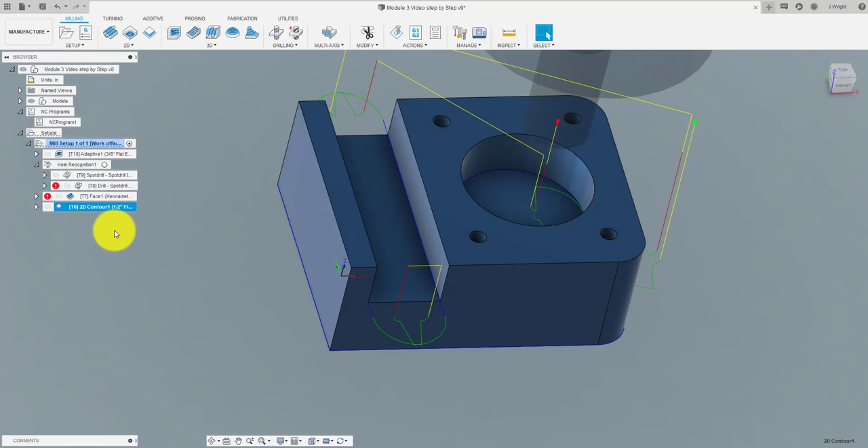So this is going to be tool 6, and hit OK. So now I've got 10, 9, 8, 7, 6. Do a Control G, grab all those tools, fix all of them at the same time. Oh, I didn't have all of them highlighted, did I? Okay, and Control G, take care of all those. There we go.

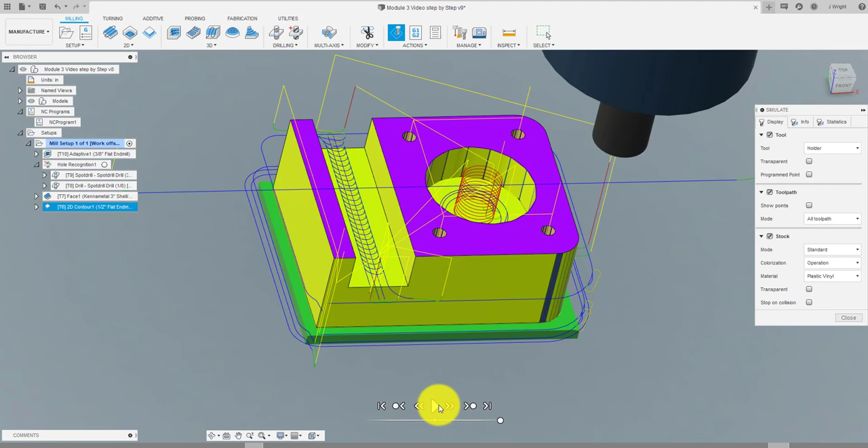So a couple more moves of the mouse. I probably like to watch this thing run simulation-wise, so I'm just going to kick it up real fast. It's nice to look at that, but remember, it does take time to do all these things. The more we run through simulation in a day, the more time we're taking up. It's the difference between getting 5 programs done or 6 or 7. So we want to try and get as many programs done in a day as we can, especially if we're the programmer and the operator, or the programmer and the setup guy, or the programmer, setup guy, and the operator, if you're wearing multiple hats.

Okay, so at this point, I would probably call this guy done. What I would like to see from you is something similar to this. I would like you to use cutter compensation on your finish tool. Go ahead and use smaller mills to do all of this work inside of here, and then finish it similar to mine. Face mill, contouring around the outside of it. Make sure you're going down deep enough that you've got full height part left over. I'm 10 thousandths deeper than what my part is.

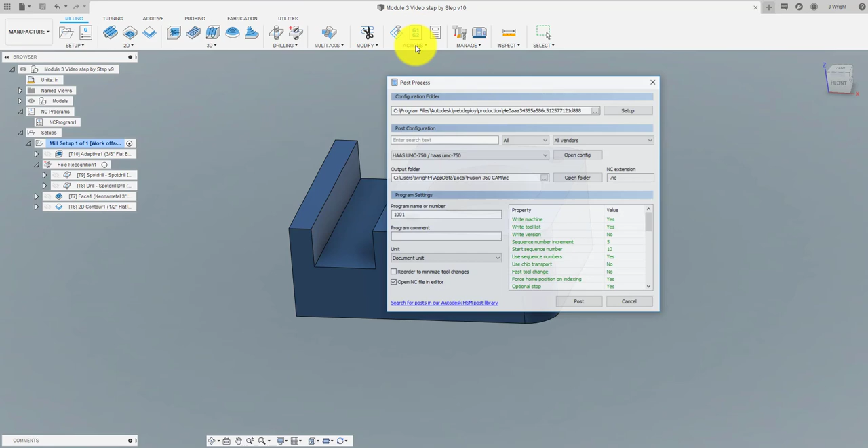You can go ahead and set your work offset at G55. So make sure that when you post out your code, you're getting it. Let's take a look at ours and just make sure. Well, this is the worst place for me to grab my code from. I prefer to get it from here, from my NC program. Sorry, jump up here. Yeah, I said 1001, and then NC code, and let's see if I got to 55. Yeah, 55 is right there. I've got, like I said, pretty long code, but I've taken care of everything else, and I'm going 6, 7, 8, 9, 10.

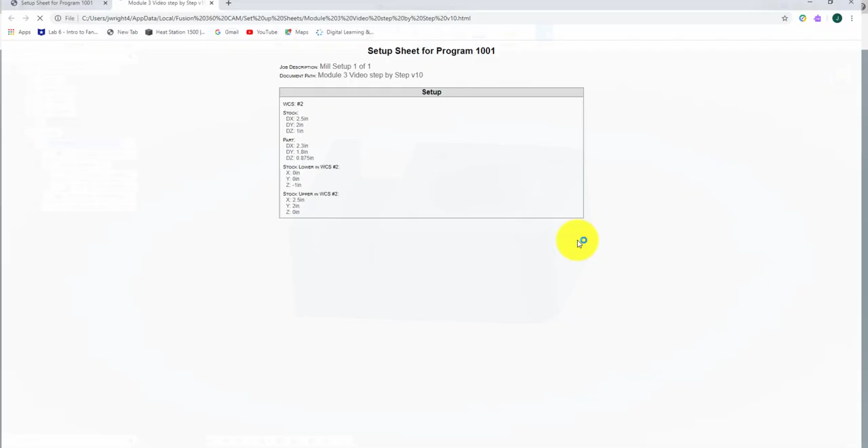And let's do a quick look at a setup sheet, just because the last one was kind of junky. All right, so I've got 5 operations. I'm going 6, 7, 8, 9, 10. That should fit any of our machines. Estimated cycle time, 2 minutes, 36 seconds. If only you could set them up that fast. So 6 days to set it up, 2.5 minutes to run it. So here's our tools, 6, 7, 8, 9, 10. Here's our operations going 10, 9, 8, 7, 6. Okay. So that should take care of all of our stuff that we need to do.

So what I want from you is your Fusion file, and I also want your outputted code. So when you do your posting, I want you to save it and then send it to me. If you're having a problem doing that, go ahead and hit save here. If I'm unsure of how to get that in, I can go to file, save as, and then put it a couple of different places. I can really kind of work around where I want it to go. And then I will save my Fusion file, go grab my Fusion file, and then send it to me.

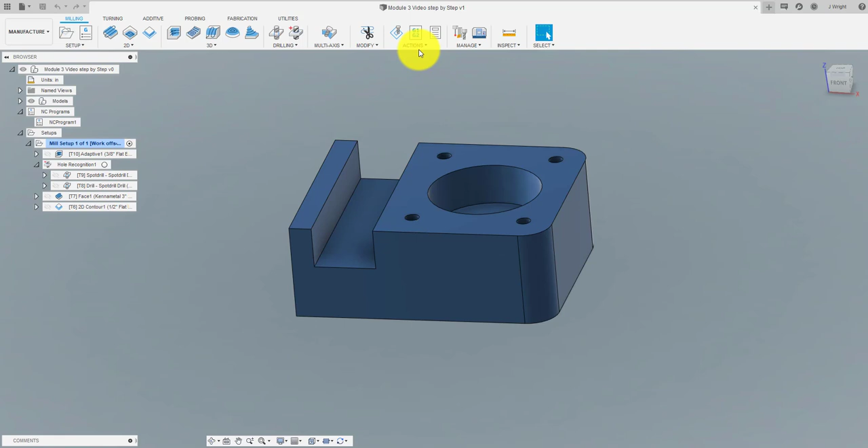And then same thing with my outputting. I would go back in here and post process, grab it, open it, and then come up here, save it where I want to, just a place that works good for me, and then grab both those files and send them to me. I don't so much need your setup sheet. When I open up your Fusion file, I should be able to see everything else that's inside of there.

So the part that you will get in Module 3 will be similar, but not exactly the same as this. The slot might be a little bit smaller, so you just need to make some adjustments for that. It will have a circle, a slot, 2 corner radiuses, 4 holes, and it will be a rectangle in shape. Okay, get to work.